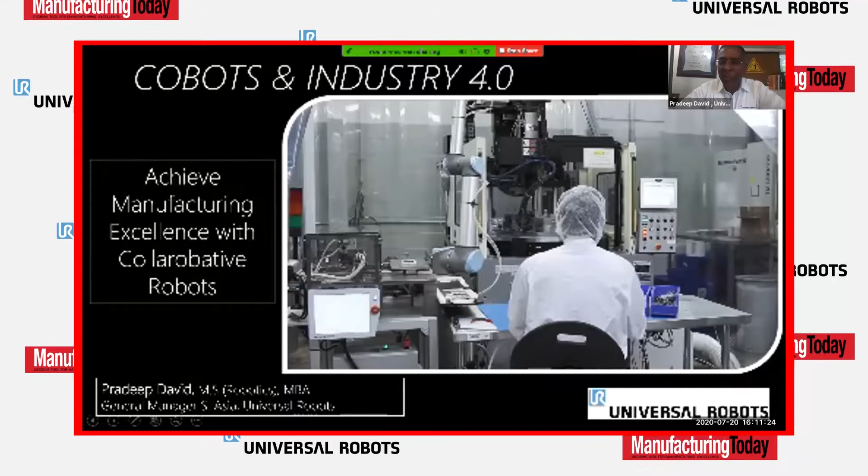Once again, you notice the operator sitting right next to it. So if he needs to do some kind of assembly application, let's say, then the robot can feed him the parts or maybe help him with the assembly. It's really something like an assistant to an operator. So maybe with this one slide, one video, you get an idea of what we're going to talk about.

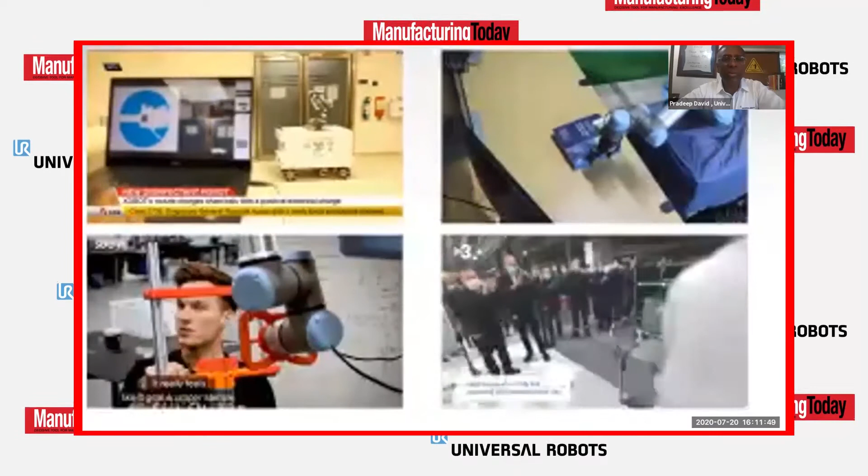Today is the era of COVID, so I think we can't start any presentation without talking about COVID. So all 4 windows, or quadrants, show you collaborative robots used in the fight against COVID. The first, top left, in Singapore, it is actually doing a disinfectant job. So if you've got a hospital or your own factory and somebody calls in sick and you want to disinfect, you can just send this AGV, controlled with a joystick, and it can go and sanitize that place.

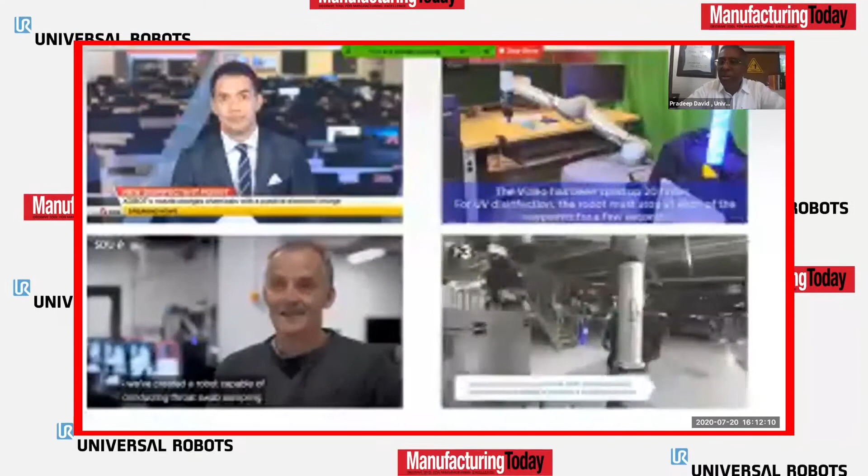The top right shows how a UV wand is taken—let's say a particular operator of that computer had COVID, so you can now remotely send this device there. It's a human arm: it opens the drawer, it cleans, it uses the ultraviolet wand to clean what you need to do. Bottom left, if you had this job our poor doctors have, taking throat swabs of people coughing into their face—it's pretty dangerous. If any of you have relatives, you know how sad it is for them, their job currently. So this robot actually has a touch sensor, and it can go feel the back of your throat and take the swab without putting anybody in danger.

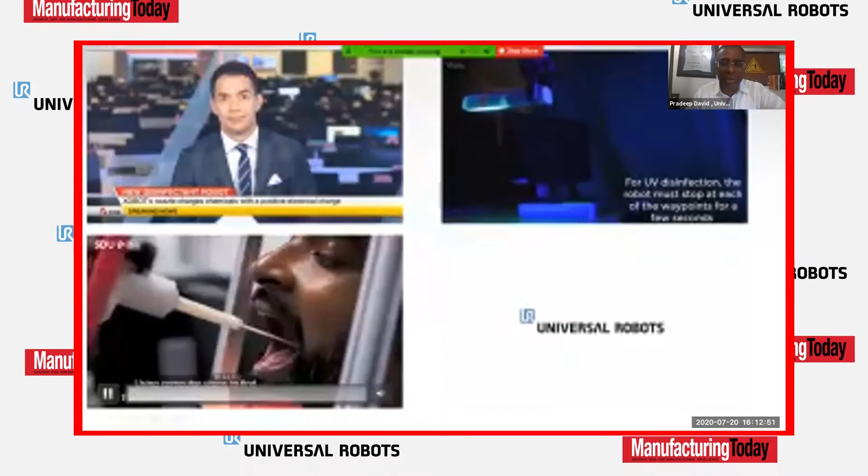And the bottom right, this is a car factory—I know a lot of car factory people are attending today. They actually turned it into a ventilator facility in Spain. When Spain had a pretty bad situation a month ago, a car factory, Seat, actually became a maker of respirators. The same Cobot that they were using for glue dispensing on the line was taken and used for that.

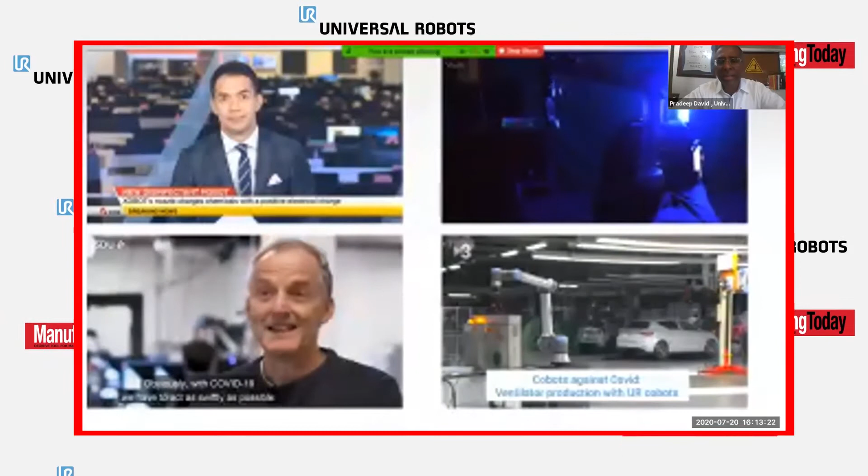So I guess you're getting the idea now, a Cobot is really a very flexible tool. It's something pretty handy that you can move around the place, use when you require it, and move it to a different location. So this was a little bit about COVID just to get started, because that's the era we're in.

Some of the benefits of this human arm looking device that we call a Cobot: number one, social distancing, which automatically creates space between two operators—I think Mr. Kejriwal will talk a little bit about this. It's also very quick to deploy and redeploy. I showed you the example of the respirator maker, how they took a Cobot from the factory—it was doing something else and now moved it to make respirators. Now they moved it back to, let's say, machine tending.

This is in Chakan in Pune, where one of our customers, L'Oreal, is actually moving the Cobot from place to place, depending on which line he needs to do the palletizing on.

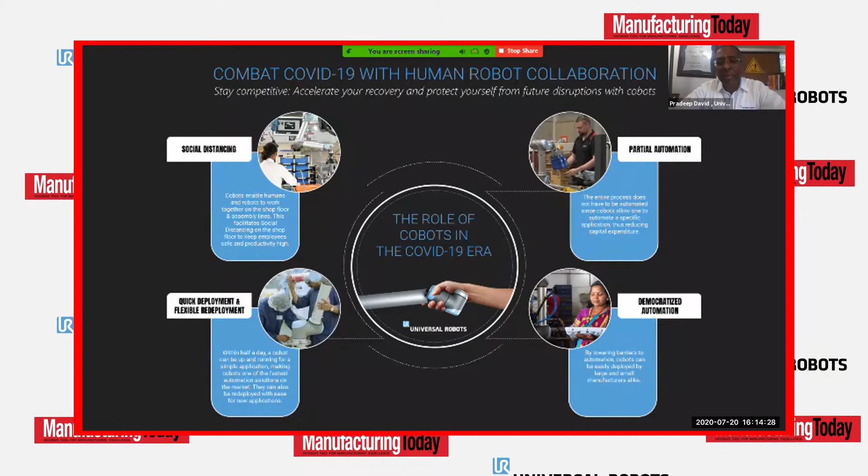Bottom right talks about democratized automation, affordable automation, unlike other forms of automation where you have to have a huge budget. Notice the lady you see there is not a robot programmer, but she's got a teach pendant in her hand, programming the Cobot at a small SME. So the point is we can teach existing operators how to handle a Cobot. It's that simple. If they know how to handle a cell phone, and they're all pretty good at cell phones, they can handle the Cobot.

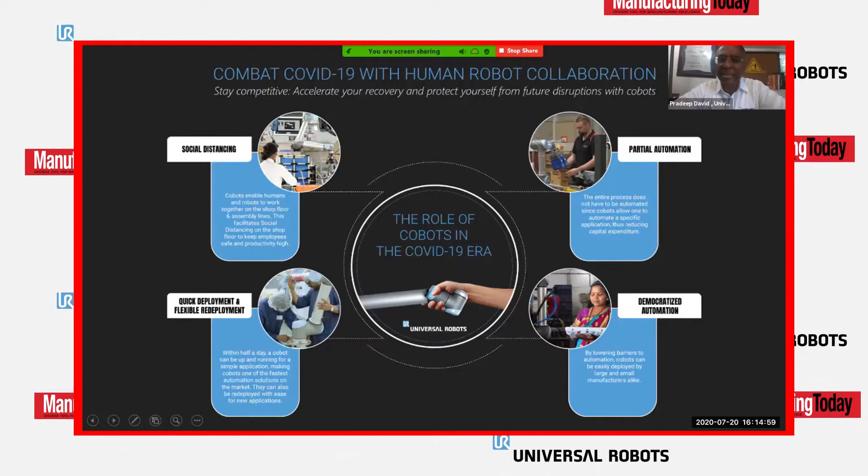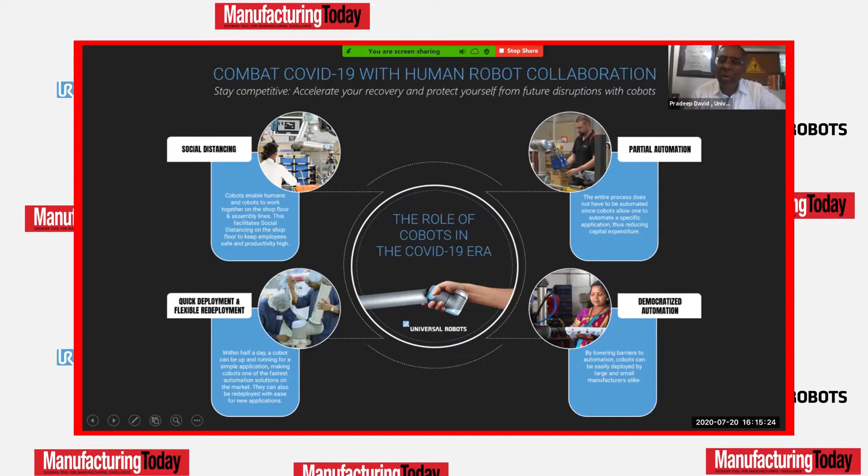And probably the most important benefit, top right, is partial automation. In this day and age where cash flow is an issue, if you're trying to automate your line or a cell, the cost is a few crores, and it goes through endless cycles of approvals. What this is doing is, notice there's a human and a robot working together. I'll show you the video in a minute. I can remove the cost of automation completely and put a robot and a human to work together, thereby removing a lot of the cost. So step by step, I can start automating the facility that I want. That's another beautiful advantage of a Cobot, where partial automation is supported.

So what is the difference between a robot and a Cobot? This one slide, just by looking at this picture, hopefully you can see it. Number one, you see the amount of floor space that a robot takes, the amount of caging around it, and that valuable floor space is gone. You can't enter because robots are known to kill people. On the right-hand side is a Cobot. It's friendly with a human being. He puts it on a trolley, moves it around from place to place. It's flexible to use. So very, very stark, the difference between a robot and a Cobot.

Robots have been around since 1961. There's nothing new about them. Cobots are relatively new because the standard that supports Cobots, the ISO Technical Specification 15066, only happened in 2016. So it's not too long ago that Cobots came into existence.

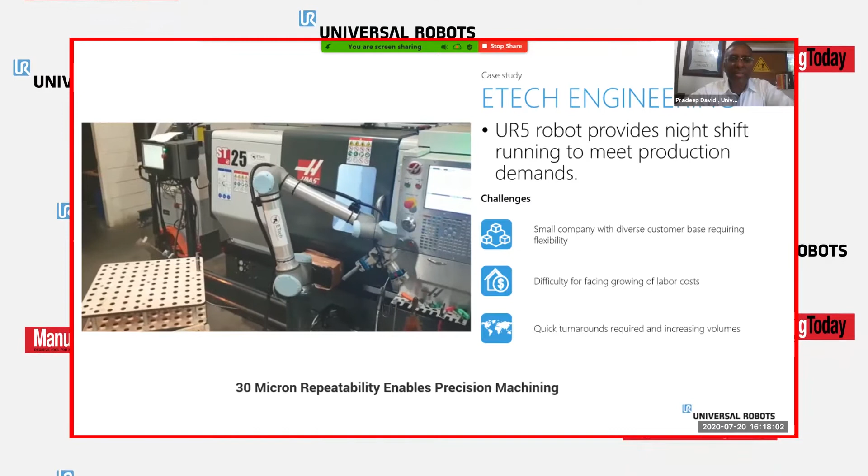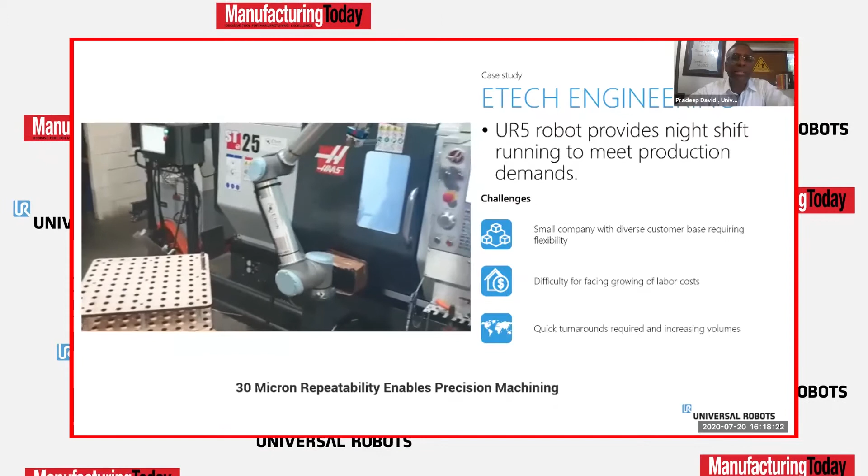And here's an example of machine tending. Here's a standard CNC machine, and a collaborative robot is picking up bar stock from an in-feed, which could be a conveyor belt or a matrix. It measures the bar stock, and notice it's got two grippers, one for the raw part and one for the finished part. So if I needed to run in the night shift without an operator present, it's possible now because this arm is behaving just like an operator.

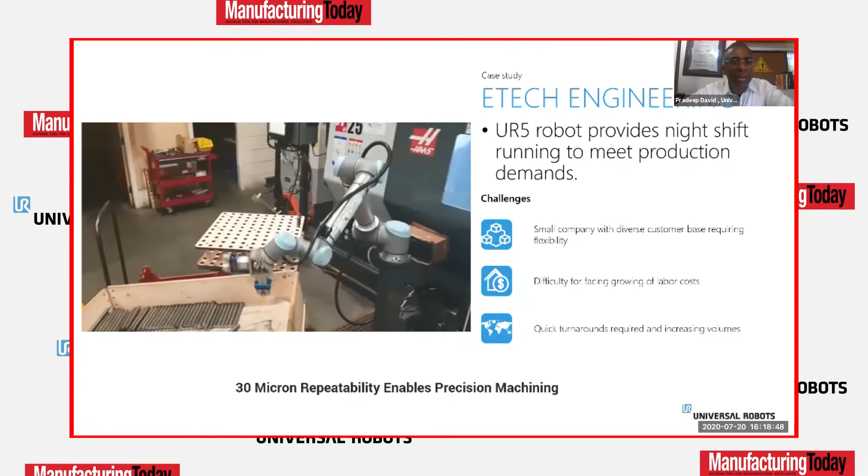Notice it is removing the machined component and inserting the unmachined component — that's why it's got two grippers. Then it comes out and puts the machined part in the output bin, starts the machine, hits the button to start, and puts the part there. Very simple, it's called machine tending. It can be done at 30 micron repeatability, a very, very standard application with Cobots.

Machine tending, for example in an unmanned night shift. In India, very commonly, you will have one robot tending two machines, for the ROI calculations and the cost of our labor. You may have two machines, and I'll show you some videos of that.

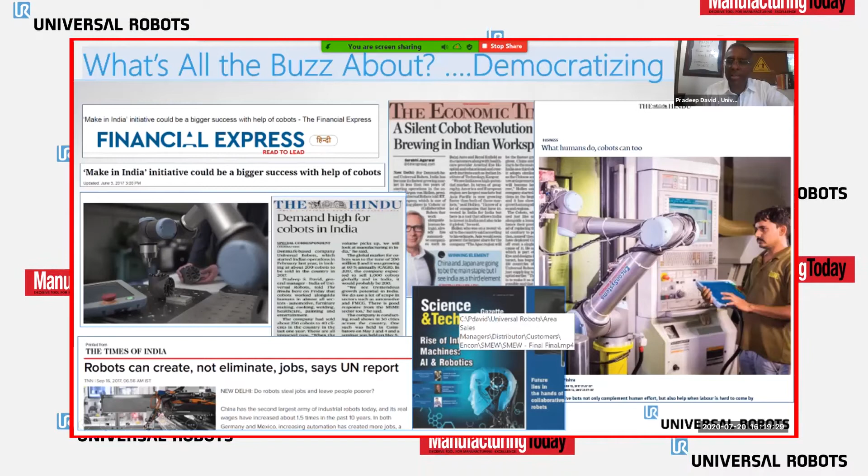So this is a very typical example of a cobot in action. Now, you may have seen stories in the press about cobots, about the silent revolution taking place in Indian workspaces. So what exactly is happening with cobots?

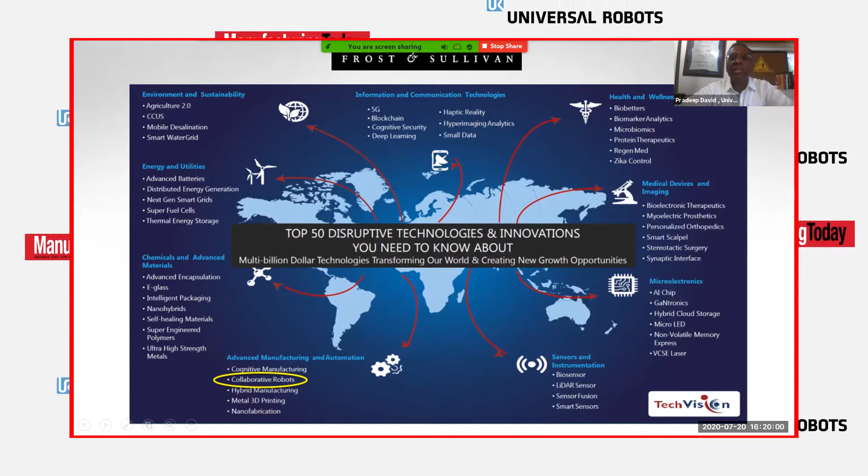When you look at a consultant, Frost and Sullivan, who talks about the top 50 disruptive technologies, we've all heard of 5G and blockchain and AI. But in the space we're in, bottom left corner, advanced manufacturing and automation, you notice that collaborative robots is a very important part of the 50 disruptive technologies. You won't see just regular robots here. Robots have been around for 60 years. But collaborative robots are future-proof.

They are actually going to help you as you get back after COVID in the next generation of manufacturing, just like 5G, blockchain and AI. So it's very important, if you haven't started using this technology, you start looking at your competition, looking at what you can do for your customers with this technology.

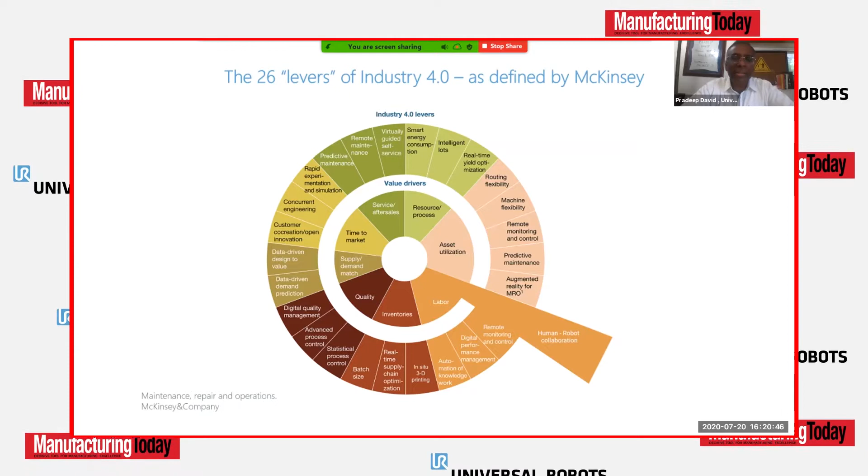It is part of Industry 4.0. I'm not here to define Industry 4.0, many consultants have done that. McKinsey has defined it in 26 different sectors or levers, as they call it. I'm just interested in one of them, which talks about human-robot collaboration. In other words, when I spend, let's say, about 20 lakhs to put a cobot into my plant, if I'm an SME, I've just embarked on my journey towards Industry 4.0, using one of the top 50 disruptive technologies that consultants are talking about to future-proof my factory. So what is this technology about?

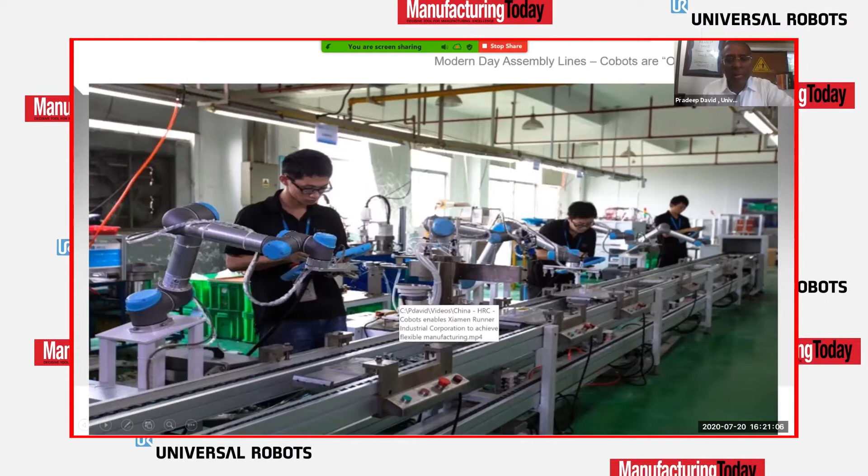Notice that this is an assembly line of the future. Human, robot, human, robot, human, robot. It's not all robots, it's not all humans, but humans and robots working hand in hand with each other.

This is an amazing concept because MIT, the Massachusetts Institute of Technology out of Boston, did a study at a BMW plant in Greenville, Spartanburg, South Carolina. They found that when humans and robots work together, there's an 85% reduction in idle time. That's not to be sneezed at. Today, with all the problems we have with labor and people who have gone back to their villages and not coming back, 85% reduction in workers' idle time and the productivity increases that you get because of that.

So look at this very carefully, because this is what manufacturing is going to look like in the future. Humans and robots working next to each other, hand in hand, and without any cages. Notice there's no cage there because it's safe. These are safe robots, with patented safety, which allows a human and a robot to work together.

Some of the major benefits: number one, it just plugs into the wall, single phase power. I don't need three-phase power for it. It's very simple to program, like I talked about a cell phone - I'll show you an example how to do it in a little bit. Every axis - and this is really a 6 degree of freedom articulated arm - each of these axes is a motor. It's a bit more complicated; there are 2 encoders, a magnetic encoder and an optical encoder, and a dual safety bus. The communication happens between 2 microchips just to make sure that the safety is foolproof, TUV certified, all that.

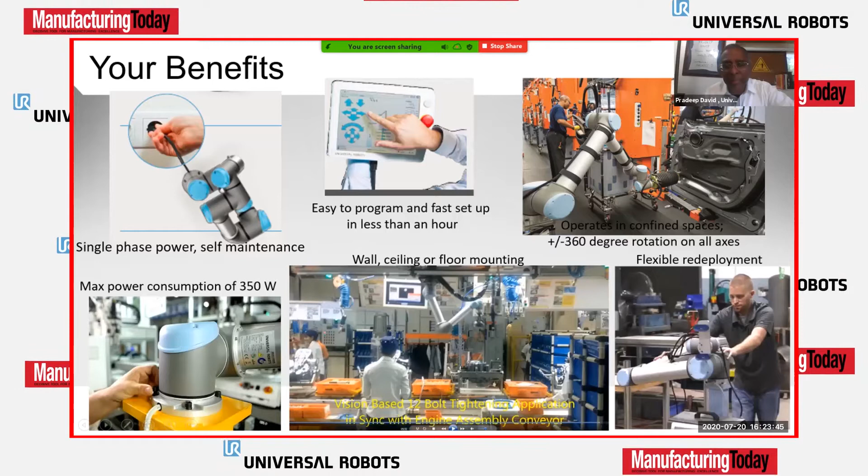This picture is from Bajaj Auto. Bajaj has over 100 of our Cobots being used, and they've actually hung it from the ceiling. You can see there's a little area where the engine block comes in, and there's a camera here which spots where all the bolts are.

There's a nut runner, and it automatically tightens 12 bolts. The Newton meters of torque is logged back to the database against the chassis number. So I get absolute best quality, and I'm not ergonomically taxing the worker. Plus, I'm automatically getting social distancing between two operators.

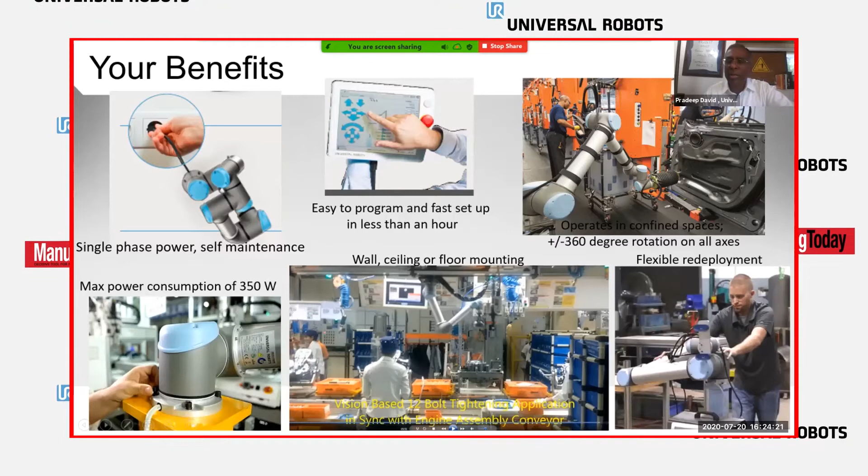Many benefits of having a cobot alongside your worker on assembly lines. And of course, as I already showed you, you can move a cobot from one location to the other. It's not easy - there were 65 patents that allowed us to make this happen.

We are one of the pioneers of this, and today you will not be the guinea pigs. There's 45,000 deployed globally - 45,000. So it's by no means emerging tech, it's really mature technology now. We've been in the business over 10 years, so we know what we're doing on this. By far the leaders in this space of collaborative robots.

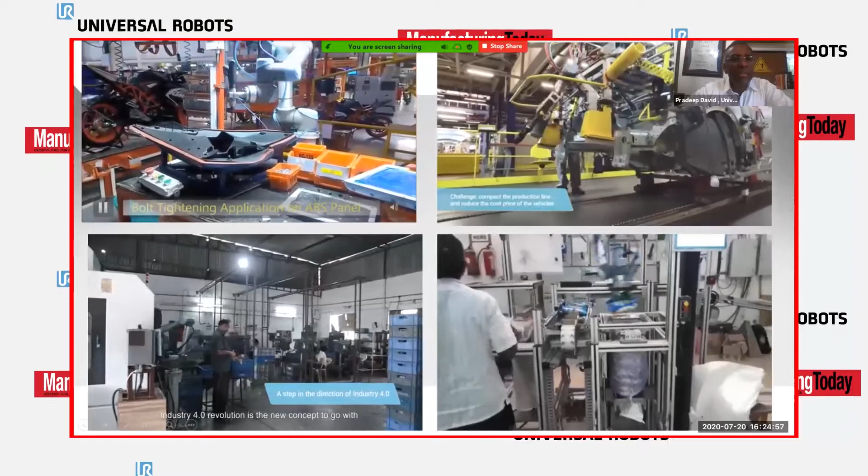A few videos I'm going to show you now, of different things. Top left, again, it's Bajaj. You can see their KTM or whatever motorcycle they're making, and this is the application I showed in the picture. It's doing the nut running automatically while she's doing some other work. So humans and robots working together - humans doing the value-added work, the robot doing the brute force stuff, which is very accurate, which you can't fail.

The top right is at a Peugeot factory in France. Notice it's a pretty complicated one, but it goes under the chassis of the car and does the bolt tightening. In some cases it'll do the washing or painting under the car, but in this case it's bolt tightening. So they have a complicated fixture that they've patented - this is Peugeot, PSA. Once they put it on the body of the car, it will go and tighten the bolts underneath.

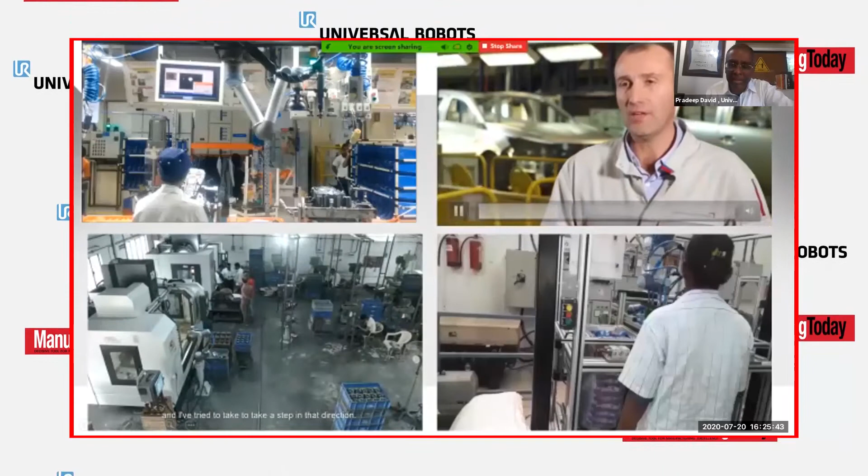Well, that's big companies like Bajaj and Peugeot. How about little companies? Bottom left, this is in Chakan, Pune. He has only 10 CNC machines, but he can afford to put a simple pedestal like this and put a collaborative robot on it, because he has labor problems and quality issues. In fact, his customer is very insistent that he better be Industry 4.0 compliant if he wants to keep supplying to this MNC. Therefore, he is required to increase his productivity by being Industry 4.0 compliant.

I know there are food and bev people also attending our webinar today. So here's an example of a small dal manufacturer in Chennai. She used to carry all these packets of dal. Today, the robot, hanging upside down from a small frame - that's called zero footprint, it doesn't use any space on your shop floor - is just packing those things into a plastic bag, and she's just changing the plastic bag as and when one gets full. So many, many examples of collaborative robots.

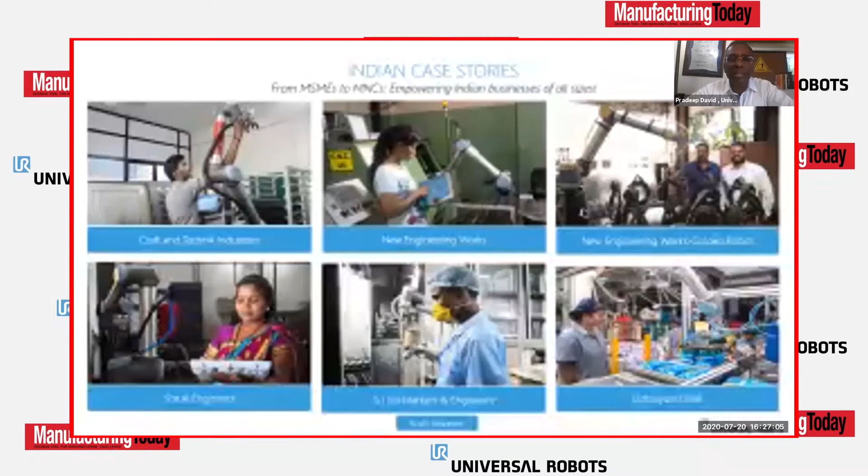We call it the big equalizer. This is not only in the domain of the large companies - even a small company, a small SME can afford this. In fact, take a look at pictures from all around India. This guy has about 150 employees, New Engineering Works, who makes parts for Tata's commercial vehicles. This guy makes export parts, he's in Pune.

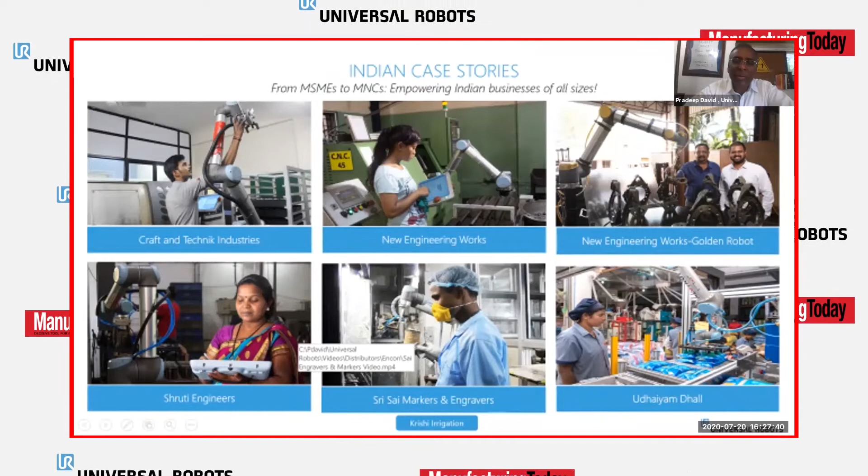His more expensive parts, maybe he could afford it, but this guy, Shruti, is a very small engineer - or the one on the right, middle bottom, Sai Markers and Engravers. He's a small paint shop, and he found that the quality of his paint was being compromised by operators in the night shift where you don't have much supervision. So he put a Cobot in, his quality went through the roof, his rejects went down. He was able to pay for this within a year. He's putting multiple Cobots in now.

So great examples - Krishi irrigation, recently on CNBC Awaz, this guy makes irrigation valves and uses our Cobot. So again, a small manufacturer, I just want to show you can afford this technology. So there's no need to delay. Like I said, with about 20 lakhs, around that range, if you have the budget, you can start with this technology for sure.

So a couple of concepts now before I turn it over to Mr. Kejriwal: partial automation and flexible automation. There was an article in a magazine about Tesla, the famous electric vehicle company, and how Tesla shot itself in the foot by trying to hyper-automate its factory. You do have to be careful. When you try to automate too much, you can go the wrong way and actually cause production to go down, which is what happened at Tesla.

They were getting orders of 5,000 vehicles a week, but over-automation caused inflexibility. Human beings need a lot of flexibility. You and I go online, place orders, we want to change it, customize the seat color, customize the way the car is. Because of this, they could only make 2,000 a week.

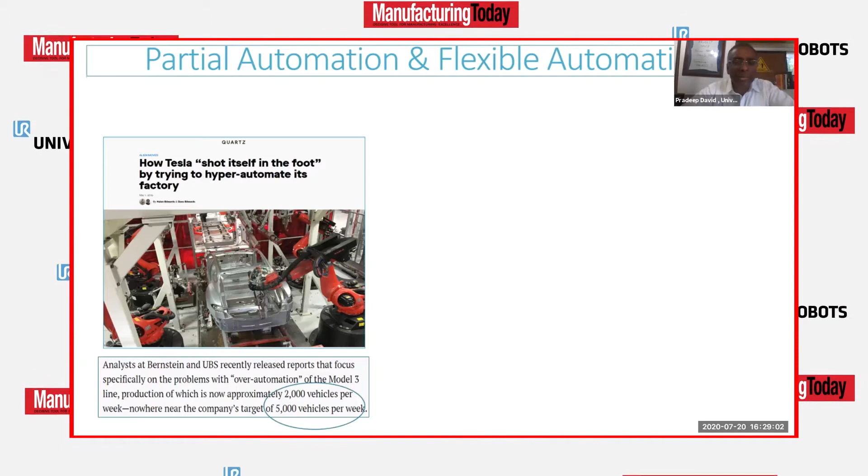It took a famous guy like Elon Musk, the CEO, to acknowledge that there's an optimal level of automation—a complex balancing act of design, productivity, quality, and human and machine skills. What does that mean? Robots and humans have to work together. You cannot have only robots and nothing else, because you lose your flexibility. Many companies have realized that and are now inserting robots and humans working together, just like Tesla has.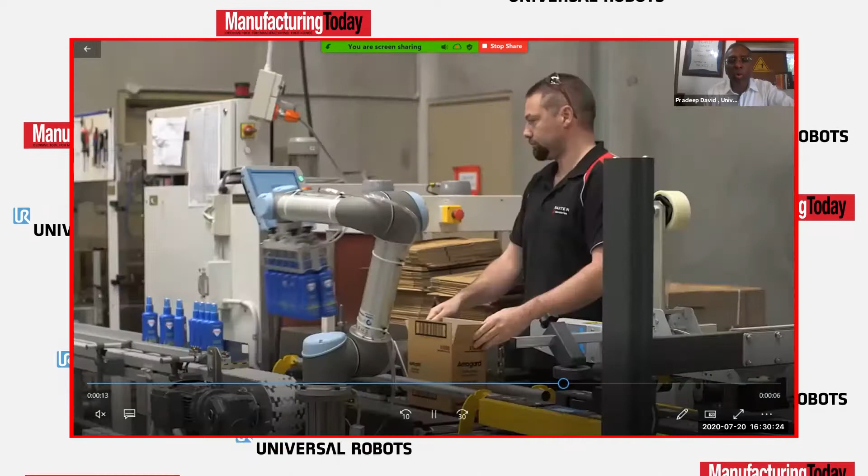Now you may say, why couldn't we have automated that? Certainly we could have, but the cost of my project would have gone up through the roof, and I'd have to wait 6 more months so I could afford a conveyor belt, a carton erector, and all that other automation to support this automation. Cobots say no, that's not necessary. You want to start today, approximately 20, 25 lakhs, get this Cobot in, let it do the case filling, let the man do the erection of the box. We can change that later on. So this is a classic example of human and robot working together, because this Cobot is safe.

I think it's very important you understand this, because in today's environment where cash is king and nobody has massive budgets, partial automation will help you do projects, get automated, and yet not break your budget the way a completely automated solution would. So partial automation is one concept.

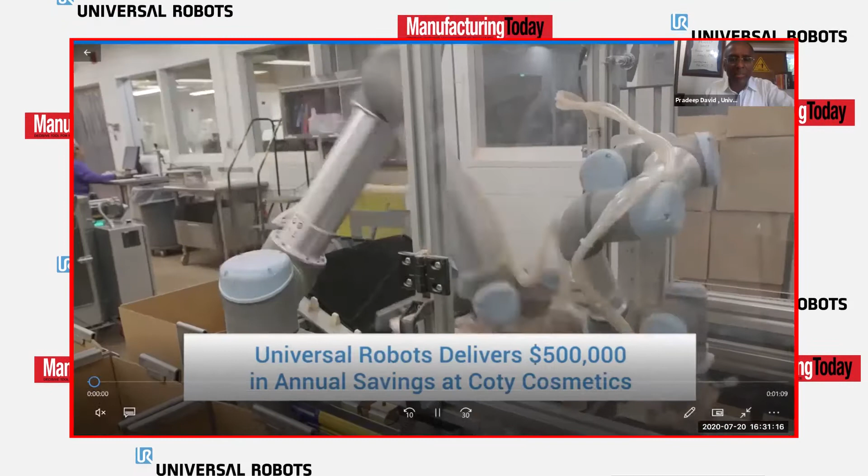Flexible automation is another. In flexible automation, I already talked about how I can take a robot from one location to the other. This is in a cosmetic factory that makes cosmetics for a company called CoverGirl—nail polish, face creams, and all kinds of things. Now they have about 12 presses where these powder puffs are made. Instead of buying 12 robots for 12 presses, they decided smartly: I don't operate these presses all the time, so I'm going to buy 2 robots, put them on a mobile cart, and go service that particular press.

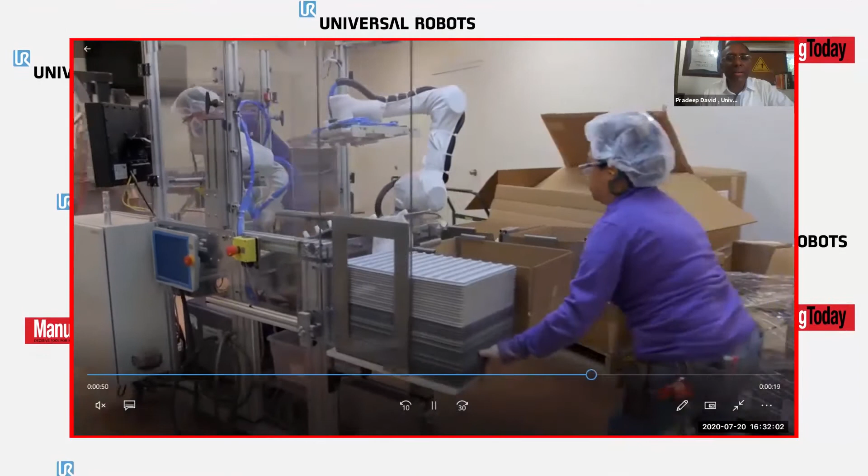You'll see this in a second, where a UR5, 5 kilogram, and a UR3 are put on a cart, and they wheel it in to the press where it's needed. So now I don't need to buy 12 robots for 12 presses—I just have 2 of these carts with 4 robots, and I move it to the location I want. All I have to do is locate the cart; I put a pin on the floor which locates the entire system. With just a few Cobots, and the fact that it's flexible, I can move it around and just plug it into single phase power. It gives me huge amounts of flexibility.

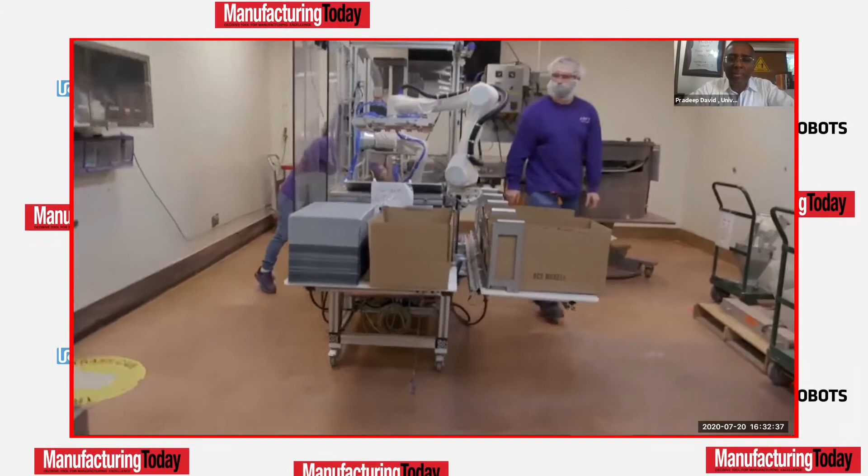So at this time, I'd like you to step back and reconsider. If you've been thinking about robots as those big devices you buy for one application—let's say painting, or machine tending—and that's all it's going to do for the rest of its life, think again. The Cobot can now help you with your COVID fight, doing something. It can move from machine to machine. If one operator calls in sick, I can move it to that machine, choose the right program, and have it start working.

If my orders go down in one line, I can move the Cobot to another line. So these are the compelling stories of collaborative robots, which a regular robot does not stand a chance of comparing with. Now, this is from a Universal Robots perspective.

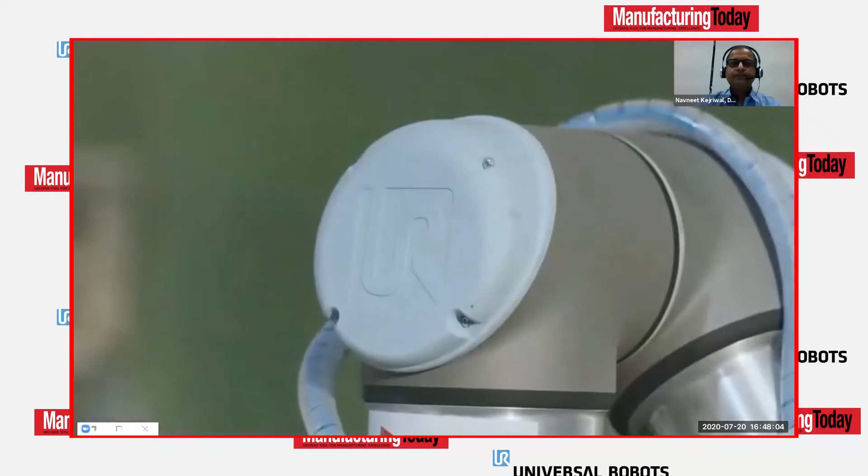It's been 1.5 years since we've been using UR Cobots, and it's been a great experience for us. I still remember when I saw the Cobot for the first time, I told my dad, this is what we need for our components.

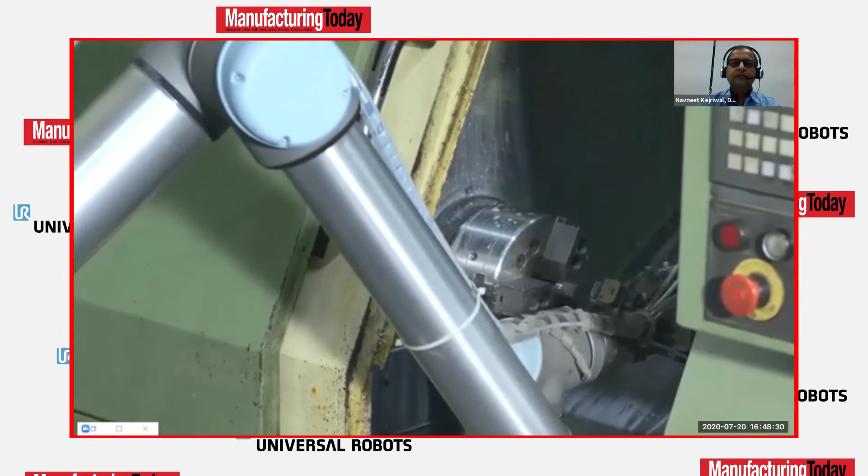We have two divisions - a small component division and a big component division. For the small component division, I think there's no better robot in the country than UR Cobots.

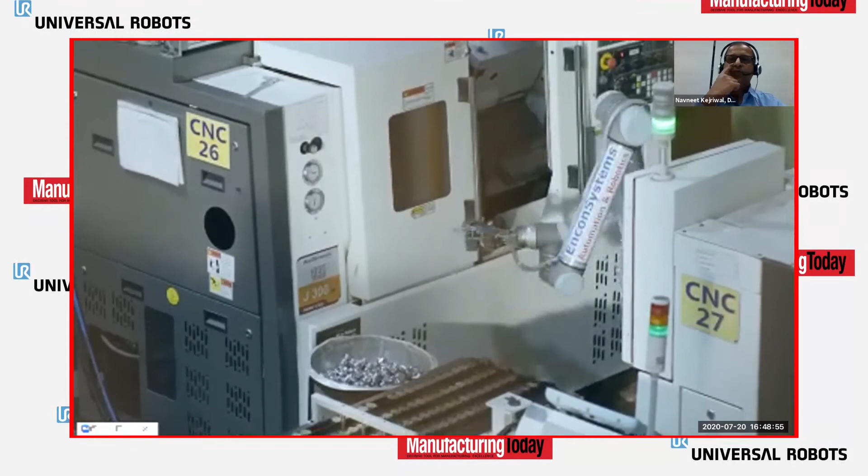When you're an SME, land is extremely valuable for you. Imagine putting these huge robots in your factory which take up so much space - you need to put a fence around them. Instead of 6 machines, you'll only be able to put 2 or 4 machines at max. But in case of UR robots, it can fit into the space between 2 machines that you have in your factory. You just put it there, plug and play, and you're good to go.

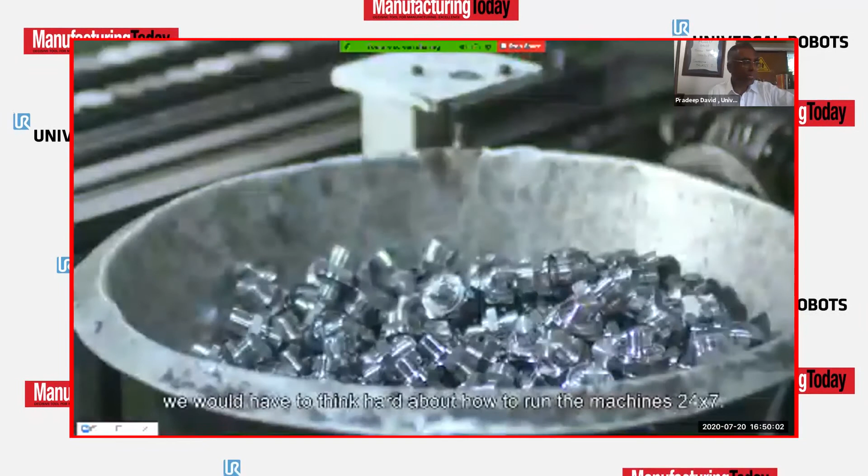They are actually cobots, collaborative robots as you call them, which work side by side with my workforce on the shop floor.

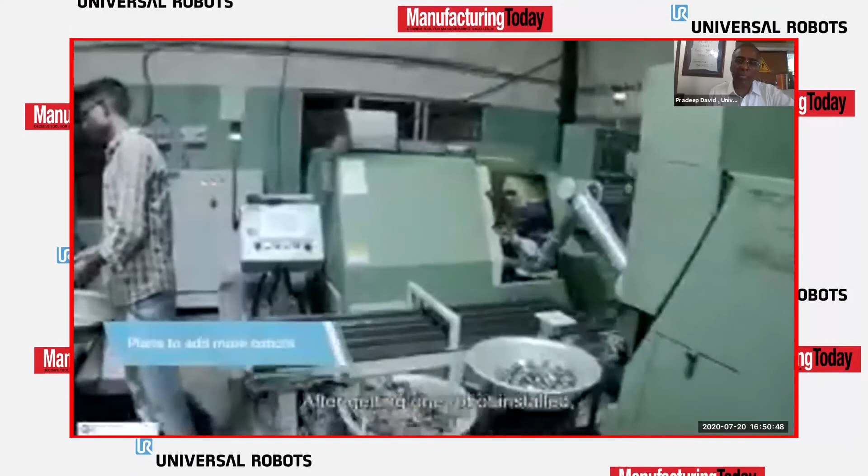So I think that's a good example of how an SME used this. Take a look at how an FMCG company is using it. One of the key priorities for the Pune factory as of now is being flexible and agile in terms of serving the market in real time.

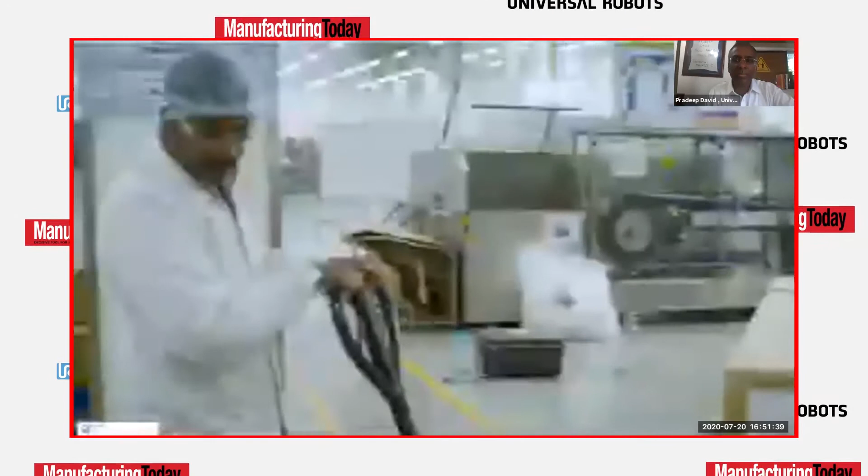On line number 27, which is one of the fastest lines in my production unit, the end of line operation, putting the boxes on the pallet, we were doing it manually. A single operator doing the entire job of lifting 8,500 kgs of load every shift. Right now L'Oreal is stepping up really hard on the ergonomics part, and this was one of the major concerns which came from down the line. When we did our ergonomic risk analysis, we found that it is a level 4 risk and we wanted to eliminate that risk.

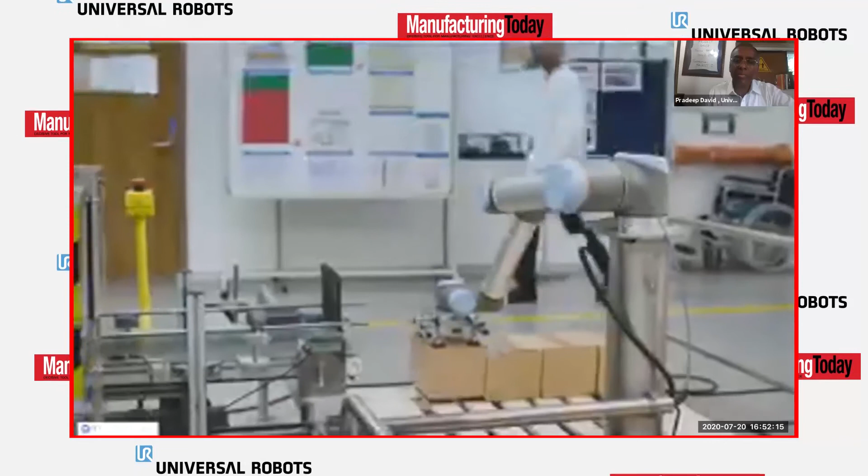We installed the UR10 two years ago. The purpose of this installation was automatic palletization. Before installation of this cobot, we used a single pallet at a time for the palletization. Now, simultaneously we can use both pallets without stopping the line, giving us a 30-minute saving every shift.

Scandinavia, one of Northern Europe's leading food companies. Atria produces vegetarian and gourmet products for convenience. Volume down, and this time we're going to see an example of food processing.

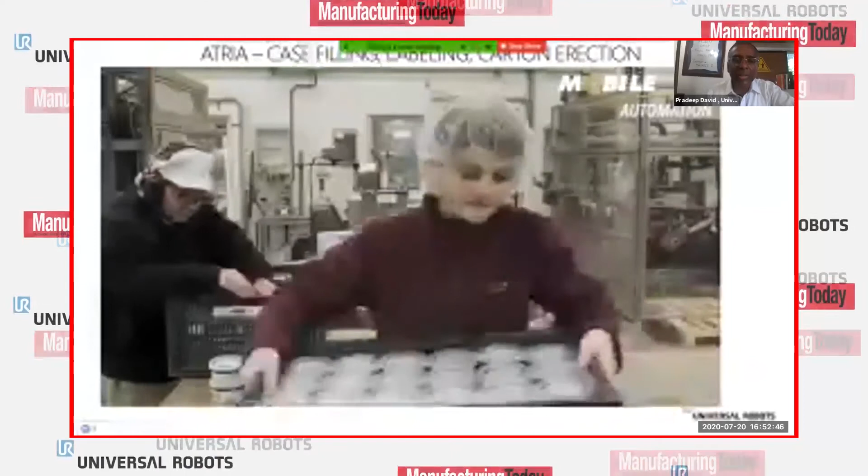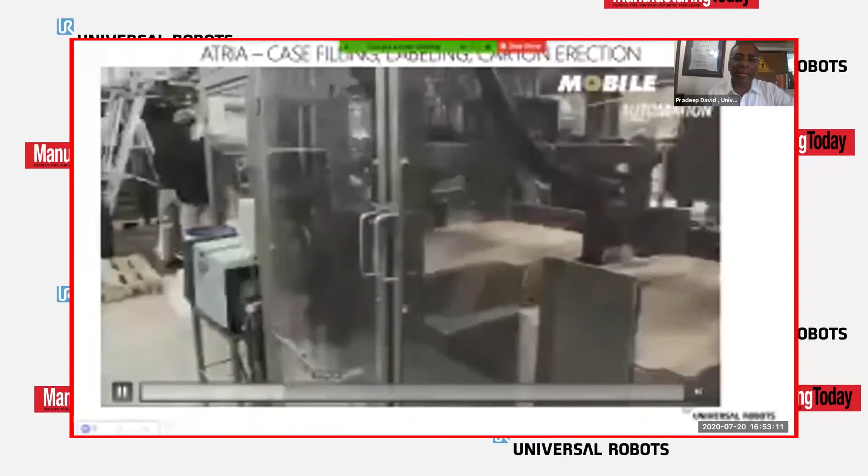So actually, you'll see secondary packaging and carton erection, those kind of things, along with labeling. So these are all cobots that you see there. So palletizing, let's see, I think carton erection will come up in a minute.

And I think the beauty is the operator is right there with the robot, right? So you don't need to be fenced off in any way. So very minimal downtime, okay? No safety guarding required.

Just to show another example, Unilever in Poland, how they are using it in their factories. Once again, for case erection, in fact they've got 6 robots here used for palletizing purposes.

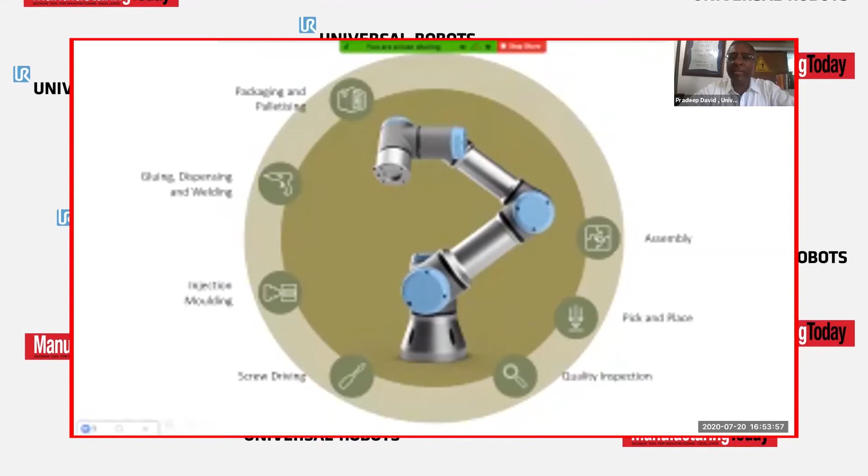In the interest of time, I'm going to just go on here and show you the different applications that you can do with this cobot arm. Machine tending is probably the biggest use, along with pick and place. But the robot is also used for assembly, as you saw on the Bajaj assembly line. It's used for quality inspection by putting a camera at the end here, screw driving, injection molding, glue dispensing, packing and palletizing. So these are the typical applications that we do.

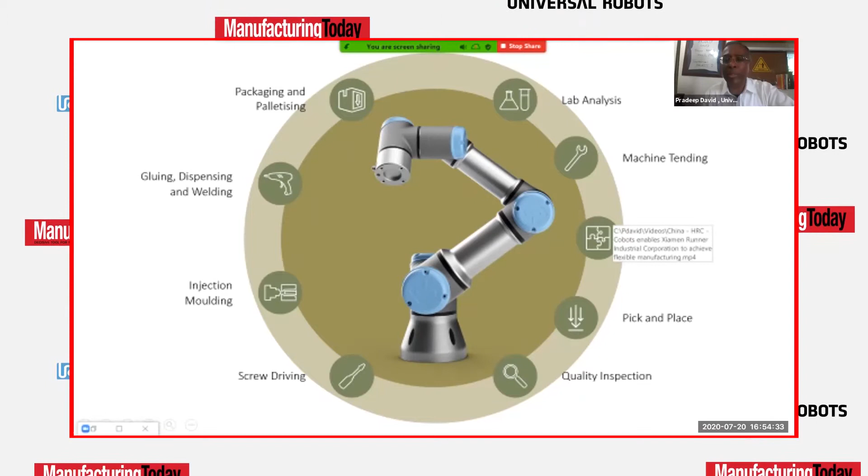Can we have the results? Okay, so assembly is one of the biggest applications that people have. Gluing and dispensing, machine tending is a large one. Packaging and palletizing is large. Quality inspection is pretty big, and other. Good.

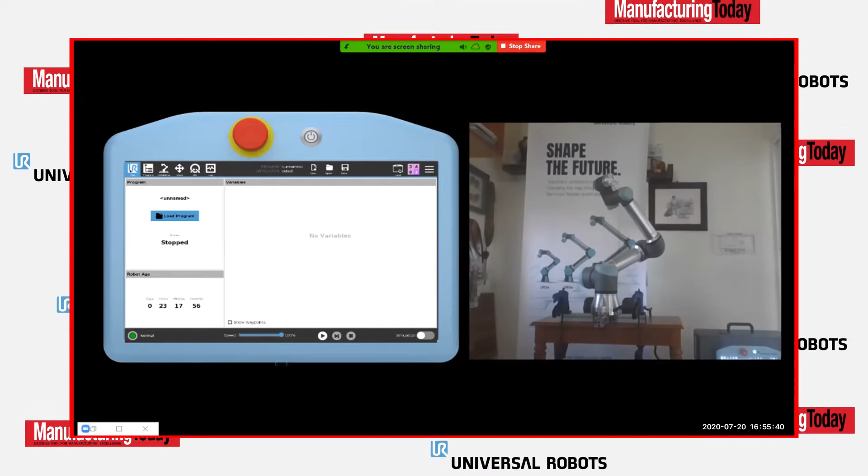Yes, okay, very good. So this is the collaborative robot, the 6 degrees of freedom. And what you're seeing on the left-hand side is the teach pendant.

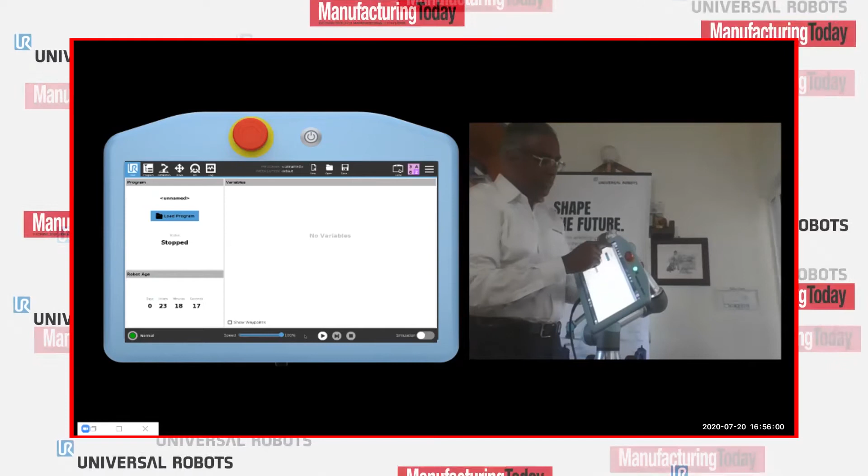And how easy or difficult is this to program? So you see at the top, there's about 6 icons. And the program, it's an empty program right now. There's nothing in it.

So in a robot, typically I would do a move command. In move, there's a Move J, move the joints in the most efficient manner. Or there's a Move L, where I want to move from one location to another linearly, calculating a straight line. Or a Move P, for example if I'm dispensing glue or paint and going on a curve, where I want the process to be absolutely smooth. So then I would choose a Move P.

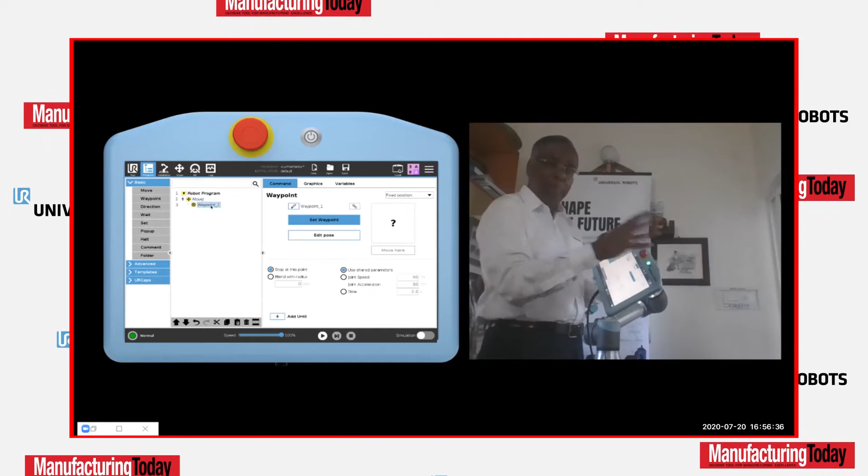So that's how it would move. And with move, I want to go to a waypoint, a particular location. Let's say this location is where I want to start from. All I can do is hold this little button out here, called the free drive button, and move the Cobot to a certain location.

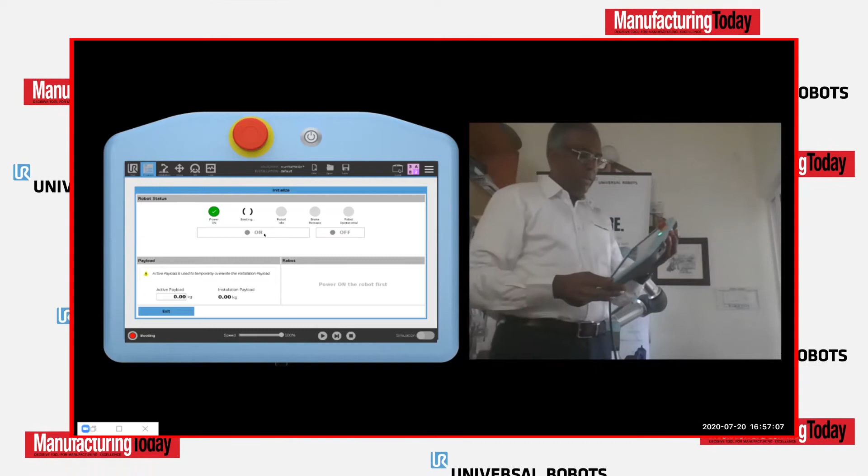So by holding this button and moving the Cobot to a certain location... okay, I just turned the power off, excuse me, restarting it. The beauty of the Cobot is I don't really need to know the coordinates. Normally with 6 degrees of freedom, I need X, Y, Z, RX, RY, RZ to locate a certain point in space. But by just holding this free drive button, I can grab the robot and move it to here.

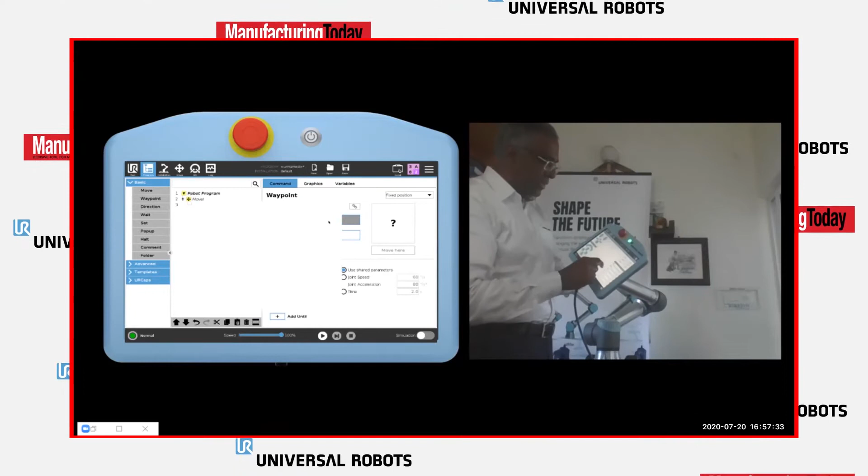Here's the location I want it to pick up a point from. At this point, I'll set the waypoint right here - these are the X, Y, Z coordinates. Same way, I'm going to set another waypoint, hold this, and maybe take the object to that point, and set that waypoint there.

And finally, I do one last waypoint, number 3. Again, either I can move it, and maybe that's the drop-off point, or I'm holding it there for a camera. So I set that waypoint, okay.

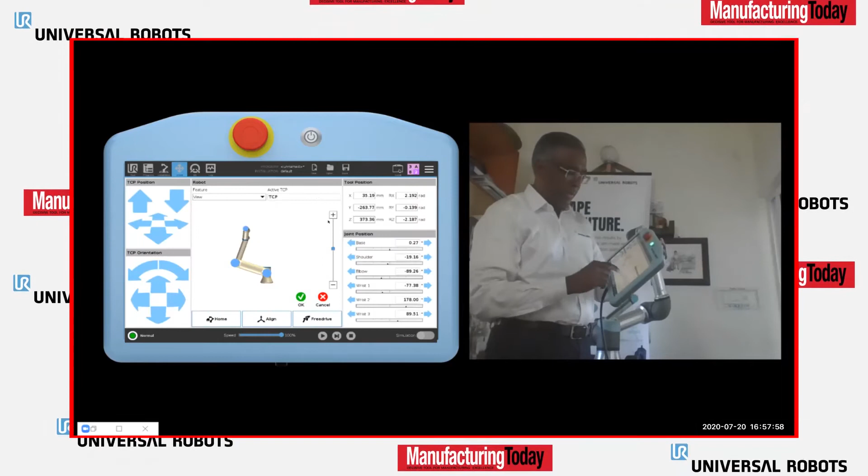Now I just want to test my program. So I move the robot to the original point where I started from, and I say play. And sure enough, you can see the program being executed - going to waypoint number 1, waypoint number 2, waypoint number 3. It was that easy. Just a matter of seconds to get a robot to move. It doesn't require any particular skills.

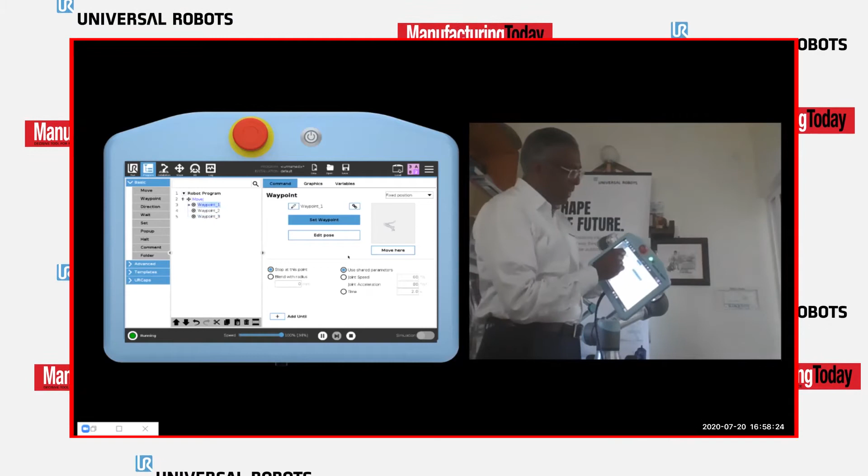Now, maybe after this first waypoint, I wanted to do a wait - wait for maybe 2 seconds. And after waiting 2 seconds, I want to set an output. There's a PLC connected to it here.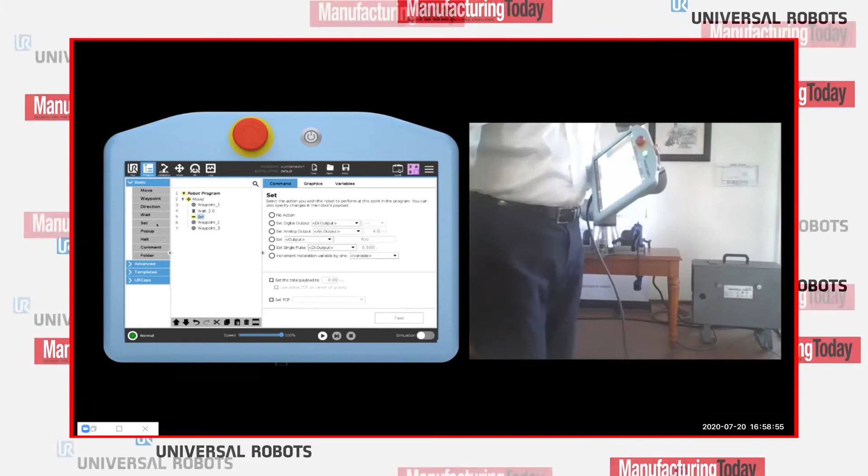If you can see here, there's a box, and this box has the control box that comes with the robot. It's got some inputs and outputs and analog inputs. It's also got various communication channels - Ethernet, Profinet, Modbus, etc. are all available in the controller.

So here I want to set digital output number 3 to high. So maybe at that first position, I say wait for two seconds and then turn on an output - that output maybe closes the jaws of the gripper. Then I go to waypoint number 2, and at that point I wait for maybe another second. And finally I go to waypoint 3.

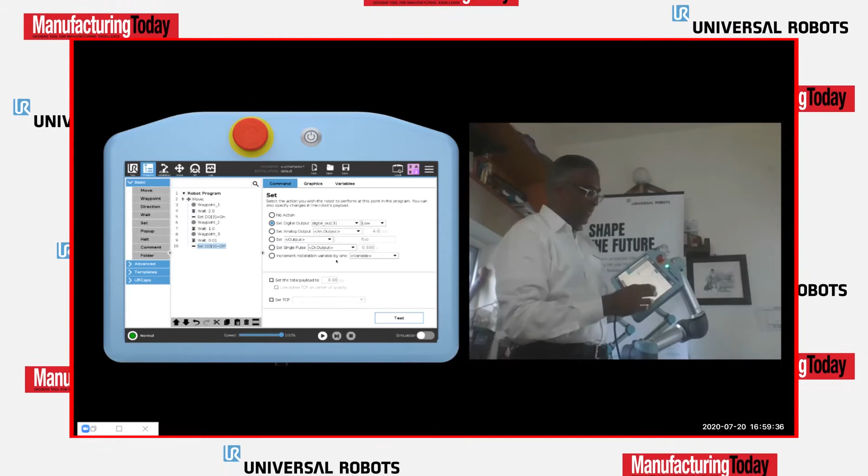Again, do another wait for a second. But at that point, I want to set that same digital output number 3 to low, turning off the solenoid valve. So that's my program now, and I'm saying go run it, starting from the first point. And then I hear it say start, go ahead, okay.

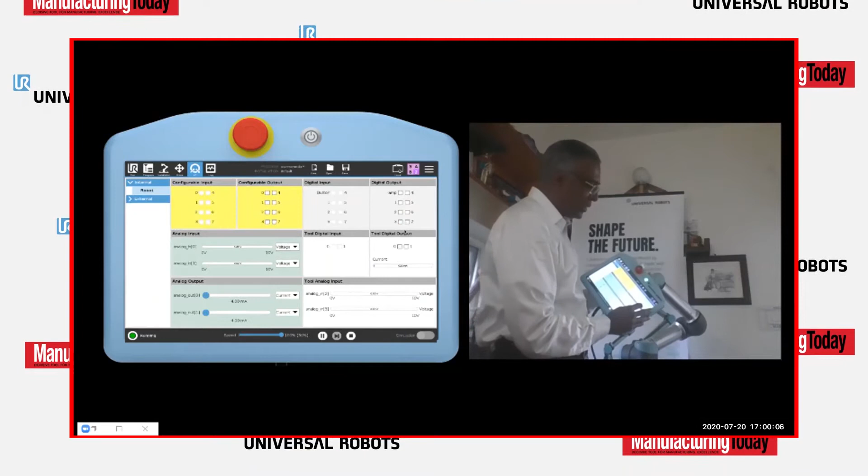Now the robot is actually going to move from point 1, waiting 2 seconds, the digital output turned on, and now it's turned off. How do I know the output turned on and off? I click this IO tab, and sure enough on the right-hand side, you can see digital output number 3 just went off - here I'm enabling it, digital output 3 came on, etc.

So a very simple program, and you can actually see the program executing here. You can also see the graphics - for example, if I want to see this without the robot around, I can put it in simulator mode and just run the graphics to see if it's doing what I want it to do. So in a matter of a few seconds, you have learned how to program a Cobot.

All right, it's that simple. And there are more advanced commands. I can go to loops and sub-programs, a little bit more advanced programming as my programming gets more complex. I have templates wherein I can choose a palletizing wizard. So all I have to do is say the first point of the pallet, the last point of the pallet, and the pitch. That's it. It will calculate all the different box positions for me, conveyor tracking, etc.

So hopefully I've impressed upon you that this is not rocket science. This is something that you can teach your operator to handle, okay?